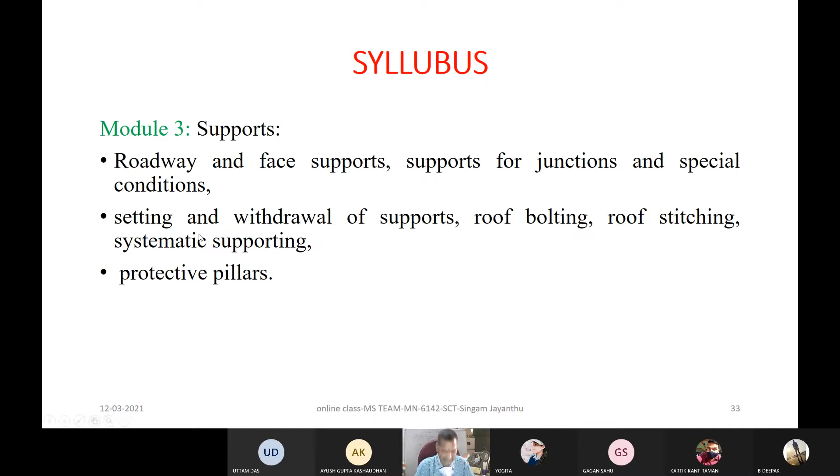From the syllabus point of view about the support systems and some material I used to share with you, whether in emails or WhatsApp, for the supports module we are supposed to know how supports are designed, protective pillars, and all these things. Some examples I shared, whether it is recent mine applications like KTK5 mine, Orient mine, GDK11 mine or VKP mine, where we are designing supports, where some accidents also took place, for development, depillaring, and so many things. Then protective pillars we designed for KTK5 mine for protection of the surface, all those things.

Then of course, stowing and filling methods gathering, regarding this we could not discuss much. That's why I would like to take some time on this syllabus with remaining issues, so that you should also have a lot of materials available. As far as our pedagogy, syllabus or structure is concerned, along with references and some materials already I submitted to you. You must have gone through, whether it is support related or whatever the courses we created, or the national mission project, or the pedagogy we did along with our IIT Kharagpur. Some of my junior scientists who are working now, we did it for that purpose of Ministry of HRD, now Ministry of Education. All that I shared with you.

So regarding the stowing and filling methods, gathering and transportation arrangements, I will be explaining something now, and a lot of materials are already there. That KTK5 mine, whatever I used to show you, along with photographs or whatever were there on the stowing related material, and reference other things, you must have gone through so many things. That's why I'm not reiterating once again all that.

These materials, submitted as a course on strata control, pedagogy, UCMM etc., prepared as part of our national mission project, are also made available to you. Many case studies of investigation, whether designing supports or whatever I used to discuss with you, must have given you some latest information.

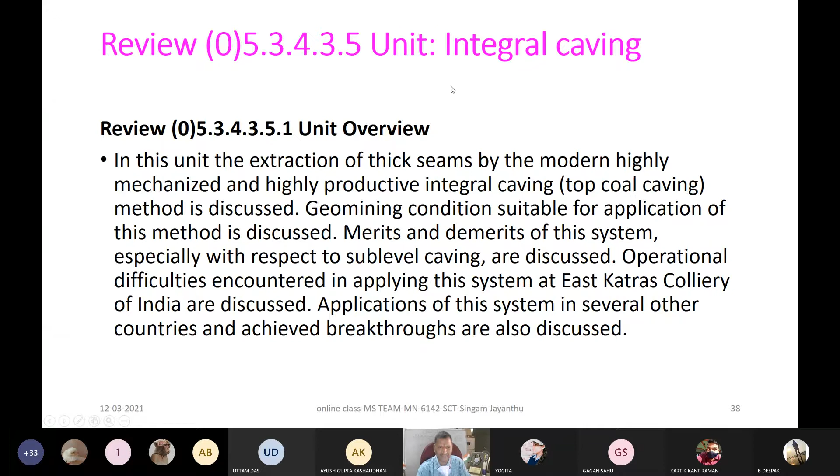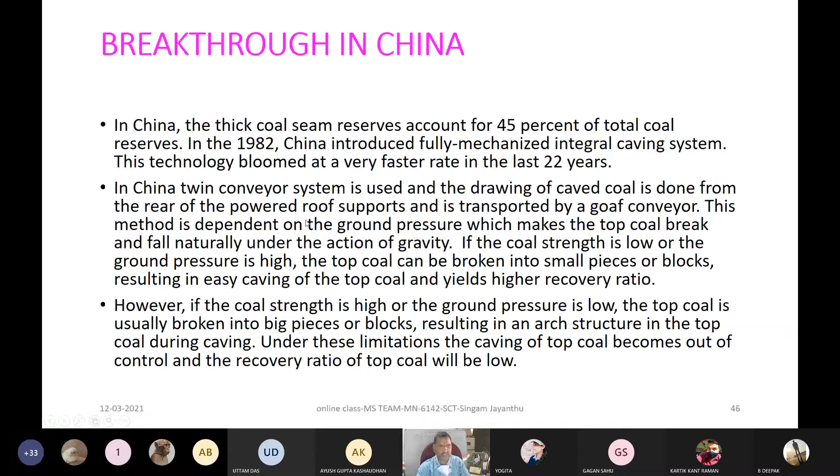That is the integral caving method, and as a unit summary, that method of mining and strata control related issues, supports, conveyor systems - all that material was shared with you along with recent information and present strategies, and then working steep and thick seams.

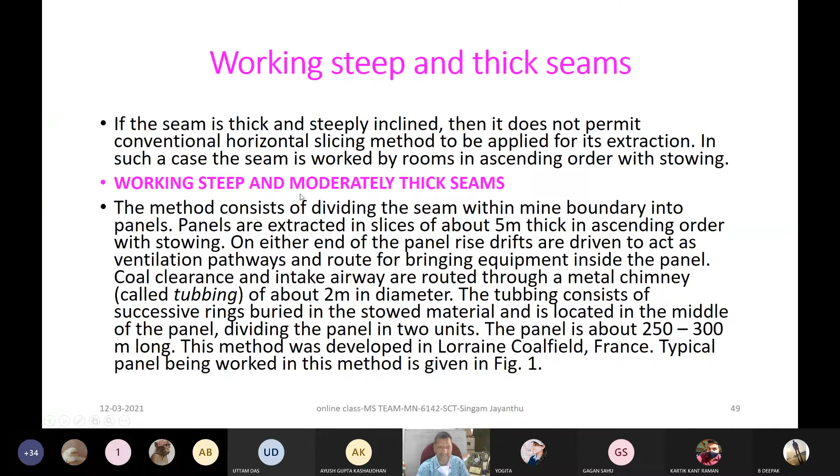A few topics, as part of our assignments, are also covered regarding working the steep and thick seams, whether it is the Camorra method, the Lorraine Coalfield of France, or the Velenjee method - one of our dear students also tried to explain. But there was some additional information I want to provide, which was there in the thick lignite bed.

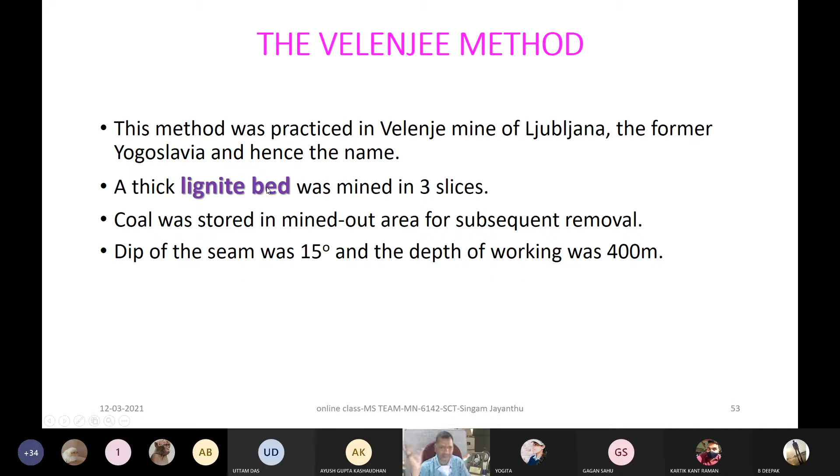That lignite has a nature of being very soft compared to your bituminous coal and all, right? That is also supposed to be noted.

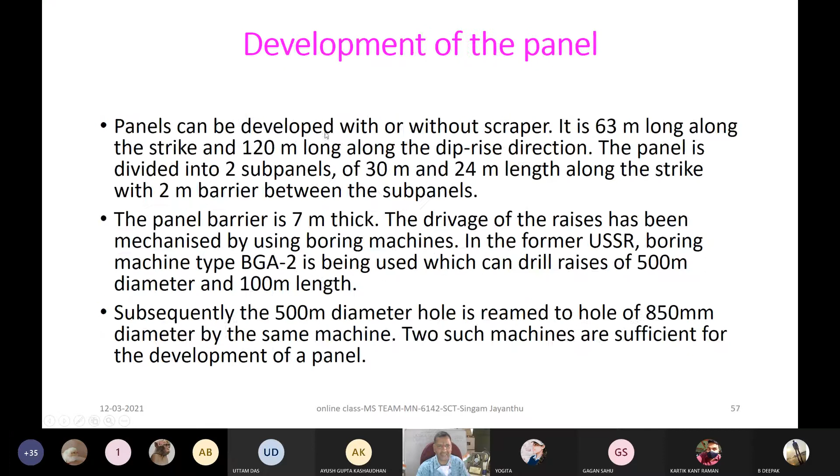In that method, a lot of things were discussed by some of our students, whether it is the descending shield method - I used to explain the installation of the shield and shield features, merits - many things are available in that material I provided.

And this Tipang mine in Assam - this is a place where we experimented. We, meaning our senior scientists in CMRS when I was there in the 1980s, under Dr. T.N. Singh Sahab, who was one of the eminent scientists in India and also Director of CMRS.

At that time, a lot of material was there, and further literature discussions were also done as part of this, and some special methods we also tried to discuss.

But I would like to say something more about this now before giving it over to your CR on the total status. For 20 minutes more I would like to discuss this, but please note down some important points - this non-effective width of extraction, right?

It can be with stowing, and that stowing can be with sand, fly ash, pond ash, sand - all those things. This is also part of some of our modules, and we'll discuss this a little bit, along with the go pillar method and chessboard method, which I also tried to discuss before.

Before going into the non-effective method, in a very simple sense - now, you may not be able to see the full screen. Let me stop sharing, then you will see. So for non-effective width, what I am trying to show is very simple.

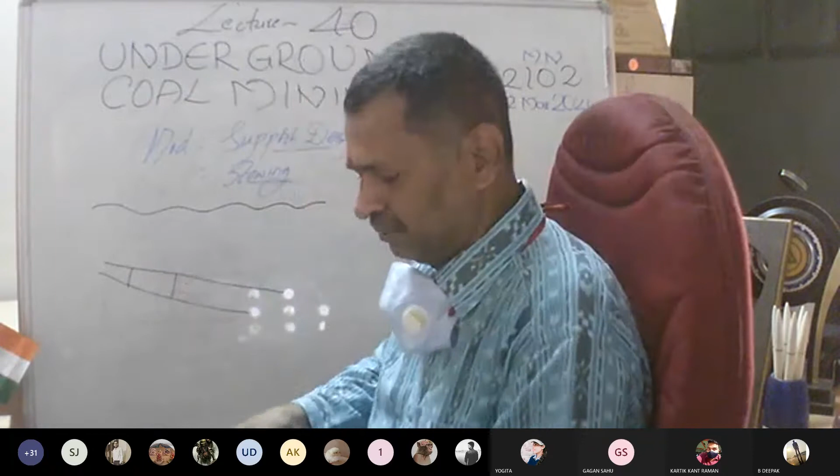If this is the surface of the deposit, and this is the coal seam whatever you have - in that case it's very simple to understand. Are you able to see the board? Yes sir, yes sir, very good.

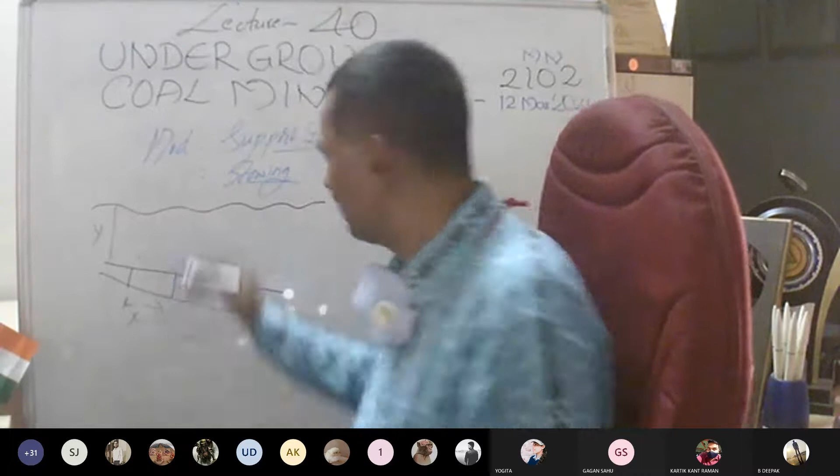So when this width of extraction is some x, right, and depth is some y - for example 200 meters or 20 meters, right - after some time, when the width of extraction increases, the roof layers which are getting disturbed fail...

...come to equilibrium, that changes. So there will be some width for those conditions - x1, then x2 - that may reach up to the surface. That is called the critical width of extraction. Then when we go beyond that, that is x3 width, then it becomes up to the surface.

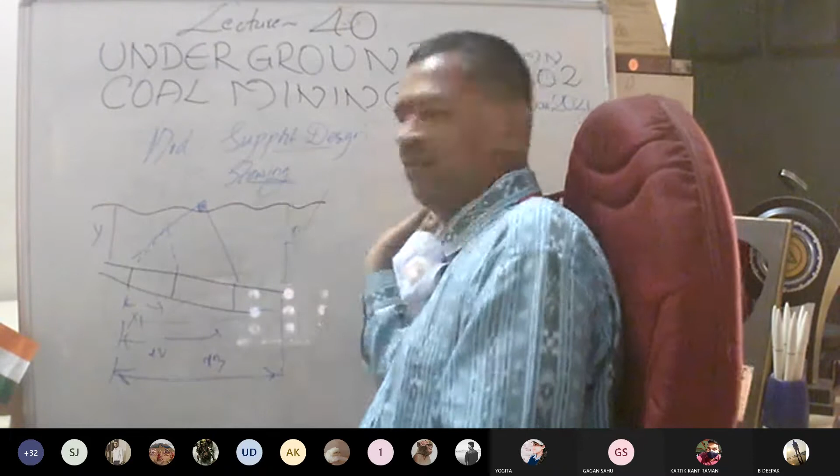There will be a subsidence, and this will be a positive angle of draw. Instead of a negative angle like this, this is a positive angle, right?

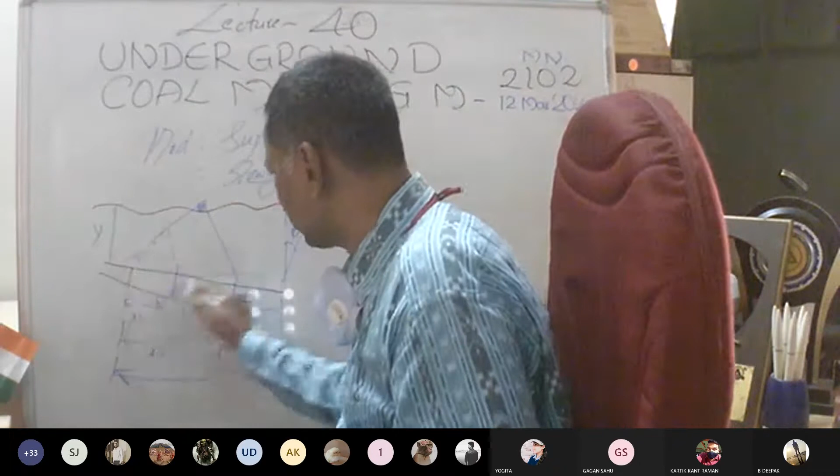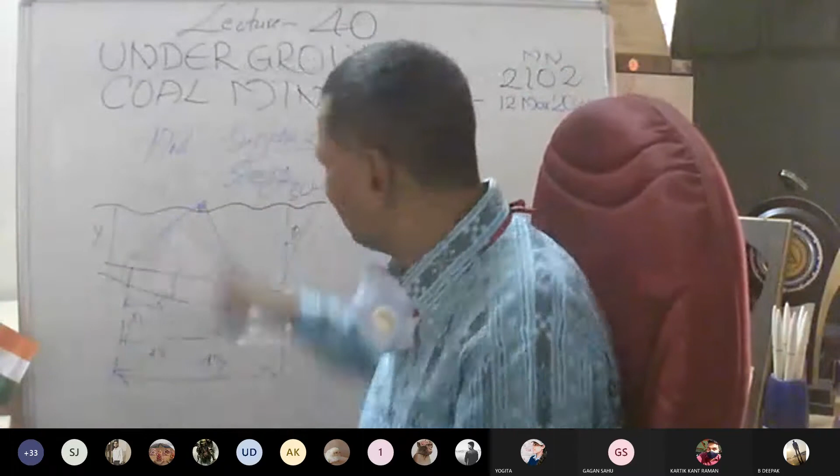So this is called a supercritical width of extraction. Below this x1, below the critical width of extraction, that is a non-effective width of extraction. Then when you design your method of working, maybe long wall or board and pillar, whatever it is, that width is restricted, so there may not be any damage to the surface. That is the simple essence of what non-effective width of extraction means.

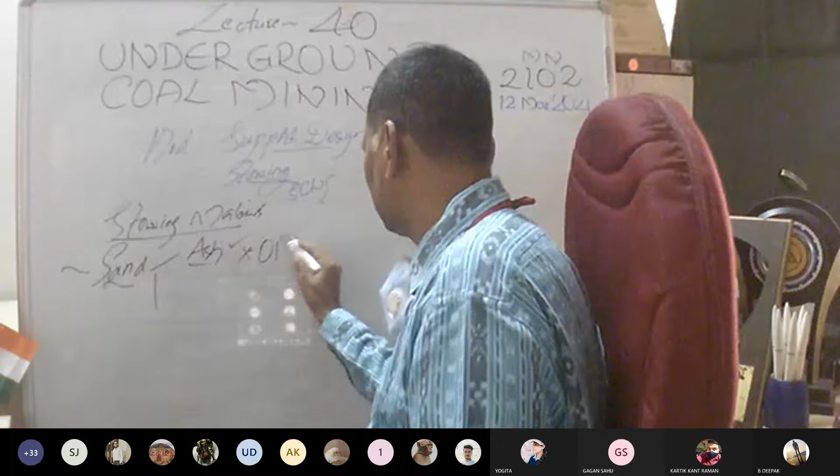Now coming to stowing related material, there are so many materials used, and as part of your previous semester you learned what stowing materials are used. Generally we use only sand, but sand is a scarce element now, so we go for pond ash or fly ash. And since that is also not available in sufficient quantity, we even go for crushing of the overburden materials. These overburden materials are crushed, and this is a very simple arrangement.

So why are sand or these materials used? What is the property of the material that is supposed to be inert? It should not react with the material that is coal. This is what minimum common sense also says, and a lot of things are written in the books. We can discuss further if there are any doubts.

Here, what is the arrangement made? If it is collected from the rivers, I would like to say with proud privilege that my father was working in this sand gathering plant in Singareni Collieries Company from my childhood, from second class, third class, fourth class, fifth class. In fifth class itself, I visited the underground coal mine where stowing is done.

So this is the arrangement made from the river. It is collected either from the pond. This is something like pontoons also, they used to call it. Otherwise a simple scraper - suppose this is a river flowing, I have a return drum on one side. This is a river flowing, so that is a source of our sand. Then this is our return pulley, and I have a scraper here. This is called a scraper.

I am pulling this, now my person operator is here, then he is pulling sand from that, and from here we are transporting through aerial ropeways and all. That used to be called Gaddala Madugu, in Old Kothagudem, that is in Bhadradri Kothagudem district now, which is my native place also, just behind the headquarters of Singareni Collieries Company Limited, where I was working as assistant manager in these underground mines in the 1980s.

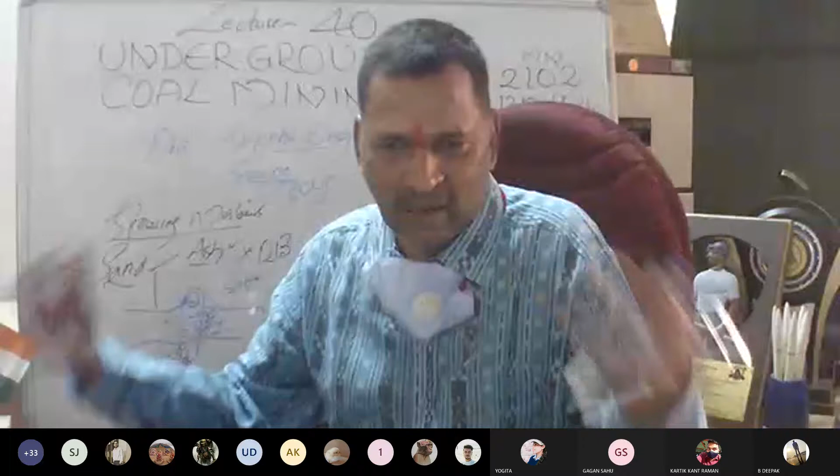So this is the way how we are collecting and transporting, mainly by aerial ropeways. We used to do that, otherwise by conveyor, otherwise nowadays private contractors transport it through lorries, trucks, whatever. That is the way it is transported.

Now how is this arrangement made on the surface for backfilling? This is very simple to understand. Even no power is required for this arrangement of sand stowing, unless it is paste filling. Note down, paste filling is the recent technology, so that we use less water, and when there is less water, it takes less time for consolidation or solidification, and less water needs to be pumped out, and there are so many advantages. That's why paste filling is the latest technology for backfilling.

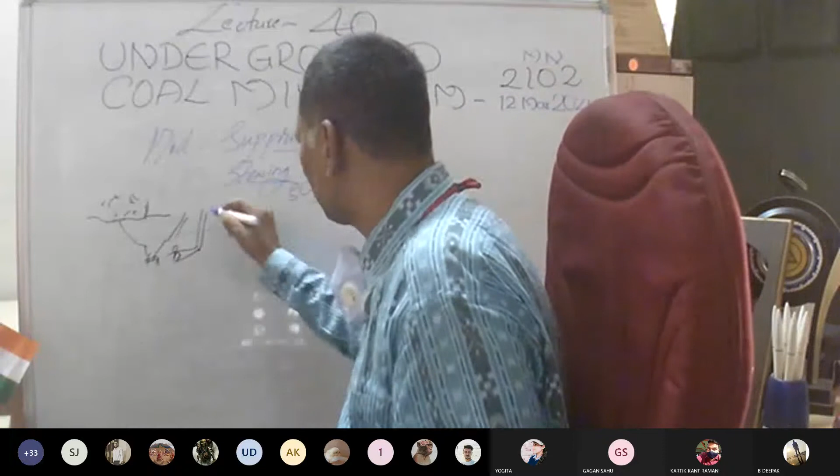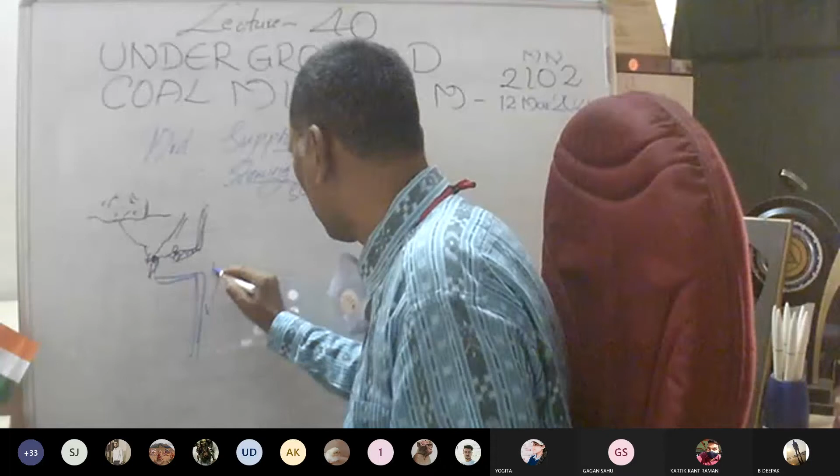On the surface, I have many examples of how we designed bunkers and all those things. Now this sand is collected in the bunker, and one of my persons opens a small chute or opening, and there is an arrangement of water - let me show you through blue color. So this is the water arrangement, mixed with water, and from here through different pipes, through the borehole or through inclines, you are sending this mixed water plus sand. The proportions and everything are written in so many books, don't worry about that, you can have a look at it.

So now it is flowing through this. For this, no power or nothing is required, very simple, right? It is by gravity, it is simply flowing through, and then it is reaching to different working places.

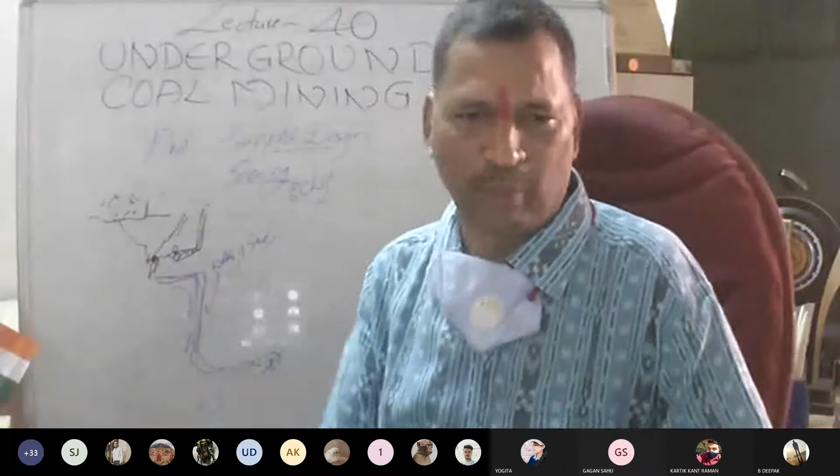Simple. There is a bunker where that sand is stored, and then a person is there, the strainer where whatever stone pieces are there, they are separated out and mixed with water, right? And then water and sand is simply flowing through the pipeline, and then there is a hydraulic gradient.

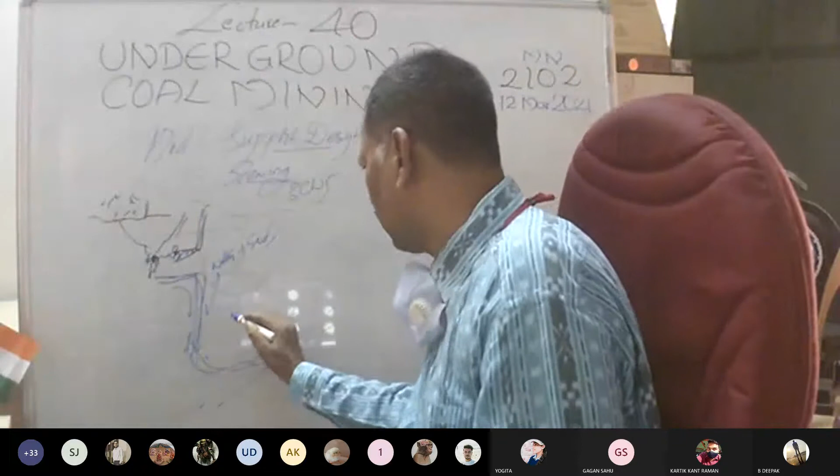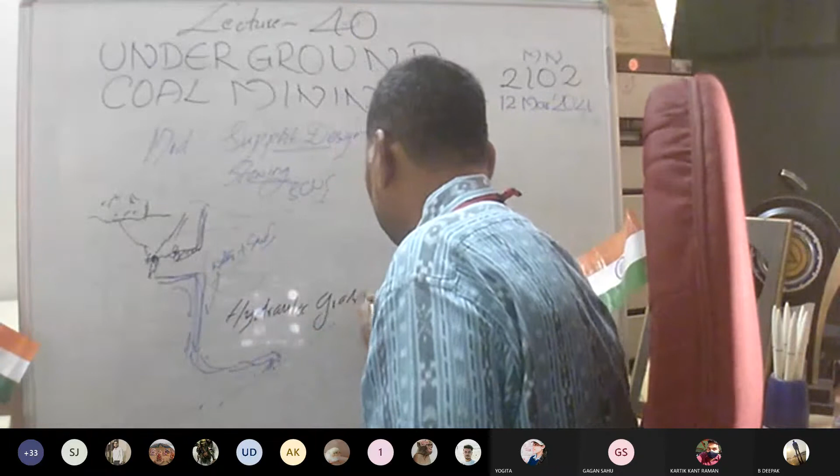This is an important point you should note down. Hydraulic gradient. This is supposed to be maintained. Otherwise, there will be a jamming of pipelines if sufficient pressure is not there. Although all this is with your natural or gravitational force, it is acting. This is the simplest arrangement of sand stowing or any type of backfilling, right?

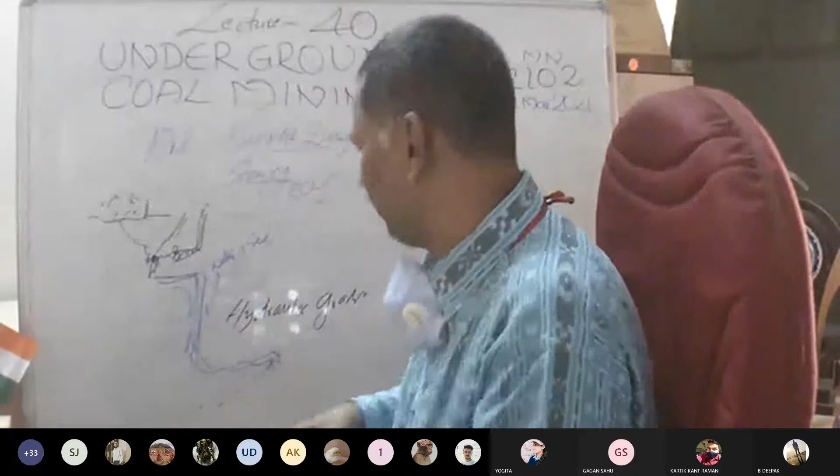But when it is paste filling, that is a very important aspect here. Paste filling is a technology people are using, right? What is required in the paste filling? It requires a lot of arrangements even to prepare that paste. That paste is supposed to be prepared with sufficient formulation and mixing with some type of additives, so that there should not be any coagulation, right? Any jamming of the pipeline.

This is the way how generally it is done. That's what I wanted to highlight before going into the next aspect of our part. Let me share it now.

Non-effective width, that part I would like to mention. We can discuss many things later also.

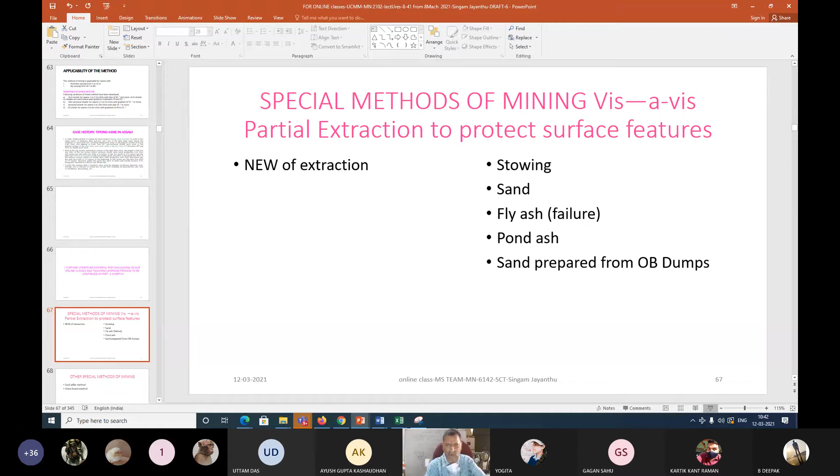Nowadays we are preparing this sand from the OB dumps also, and Singareni Collieries Company Limited is a pioneer in preparing this, and they are doing that. In Southeastern Coalfields also they wanted to apply it 4 or 5 years back. I was there with them.

Right now, fly ash is a failure because there is a lot of damage when you are filling it back with fly ash; this is causing a lot of pressure on the barricades, right? Barricades are required to hold that fly ash or sand, whatever it is, and that should be in such a way that dewatering should be properly done. Otherwise, what will happen with that water? There will be a lot of pressure, right?

So when it is a coal seam, a gallery, you are filling this part, then when it is a gallery like this you are filling, you will be constructing one barricade, right? Then the other part which is something like a room you created, and in that you kept the pipe, whatever pipe I have shown here, this pipe will be kept up to that, and then you will be doing that filling back, and that barricade, whatever water is left out, that will be coming out and you will be pumping out. And if that is not properly decanted or that dewatering is not proper, then that causes a lot of pressure on the barricades. That is the reason why fly ash is a failure, which we conducted.

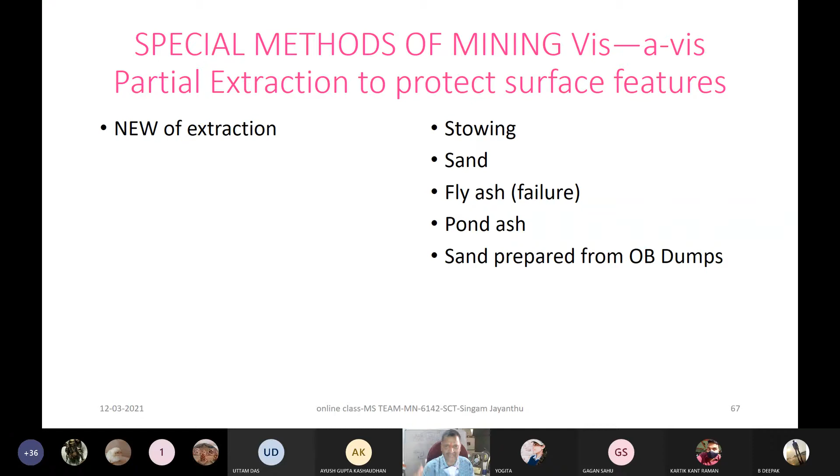So you can write these names, you will get a lot of information. And then CIMFR, CSIR, all those things, right? Because in Manuguru, in SRP 3 mine and GDK 1 mine, right? These are the places where we tried to do it, even with pond ash. And KTK 5 mine, there is a failure with fly ash. That is the reason why I am telling you. Okay, then go pillar we already discussed, but chessboard, that is nothing but in pillars.

When pillars are there, this is also to create some type of non-effective width of extraction. When there are pillars in this way, what we are doing is we can create non-effective width of extraction such that I extract only one row of pillars or 2 rows of pillars and leave the other rows as barriers. Only non-effective width in that way.

Otherwise, chessboard means I can leave this pillar, extract this, and leave this. So this is another way where this much is a non-effective width, so that will not fall. There are so many ways people try, but it is not very popular. Let us not discuss much.

Now coming to the most important aspect of designing supports, I have already given you these materials. Let me know how many people could go through some of the course materials I sent to you, the course materials on support designs. Have you received it? Because we conducted many courses, more than 20.

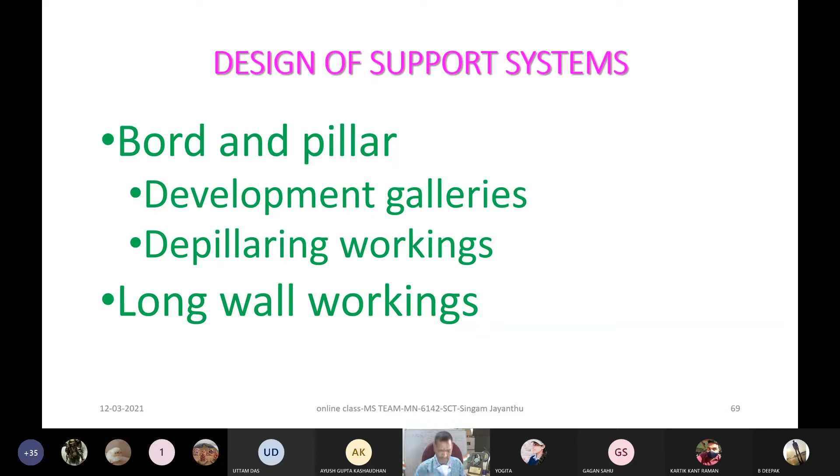Yes, right. So in that itself I have a lot of material, but don't worry to read all that for the time being. Only the material related to support design is sufficient. In that itself, what we are supposed to understand is bord and pillar: in the development gallery how to design the supports, in the depillaring workings how to design the supports, and in the longwall workings how to design the supports. If that is understood for your present purpose of this pedagogy for this semester, that will be okay for you. And of course you will be learning more in other courses like Strata Control Technology and so on.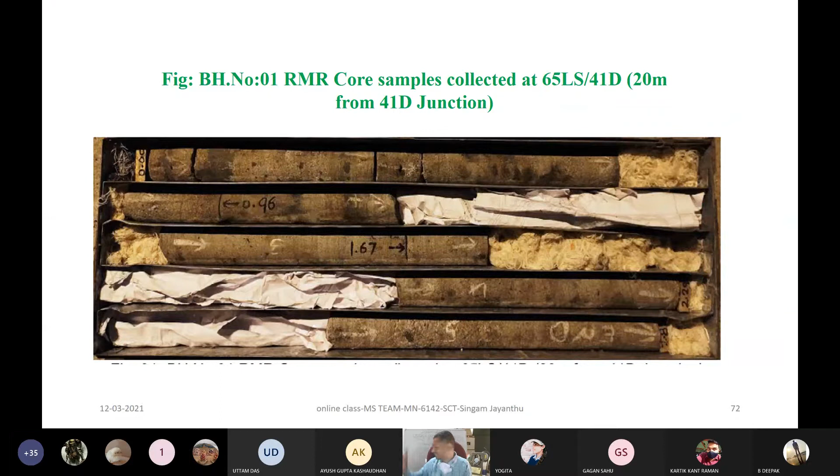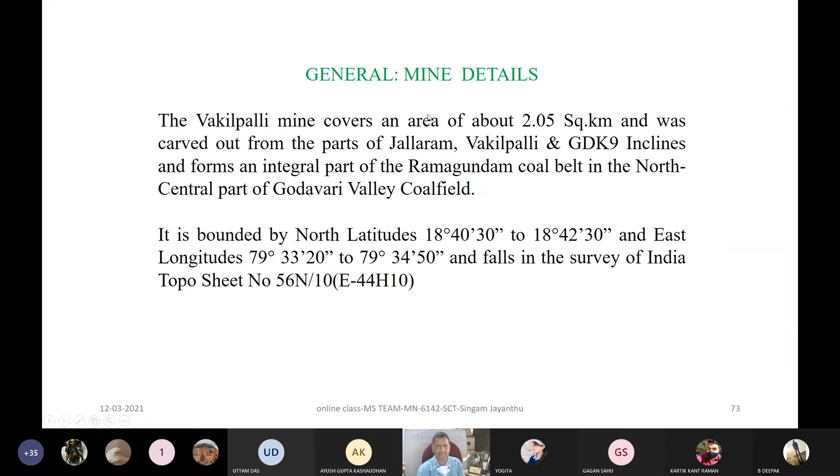And these are samples, it appears like this. I was showing you at that time, I sent a lot of materials also at that time, but this is one simple example where some investigations for that are done. But the basics behind this is to understand this rock mass rating.

What we do is we make a borehole up to around 2 meters in the roof. Why should it be 2, why not 2.1 or 1.8? These are all based on our previous experiences and also some scientific studies. More so, it is an empirical formulation rather than any analytical or numerical model study.

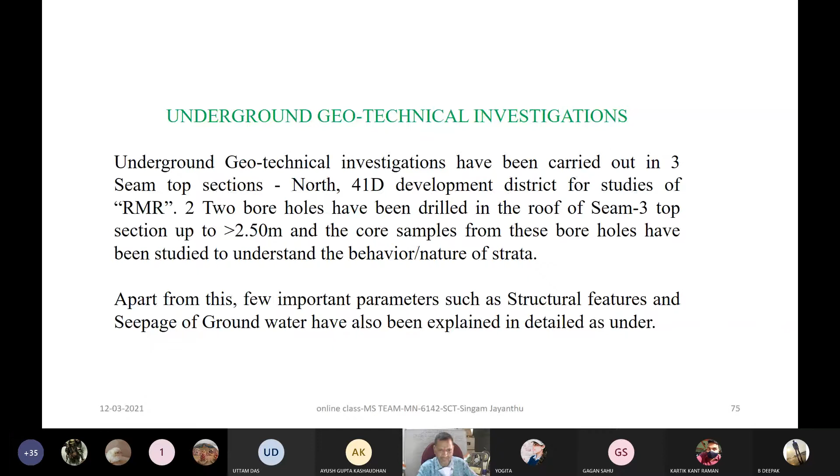And we will be observing what is there in the roof rock mass at that place, and then we will be designing the supports accordingly. I think it is better to show your material first, whatever was there, then it becomes easy, I hope.

Sir, you're muted. Can you hear my voice? Are you able to hear my voice now? Because it was like this. Now somebody can talk. Are you able to hear my voice? Yes, sir. Now? Yes, sir.

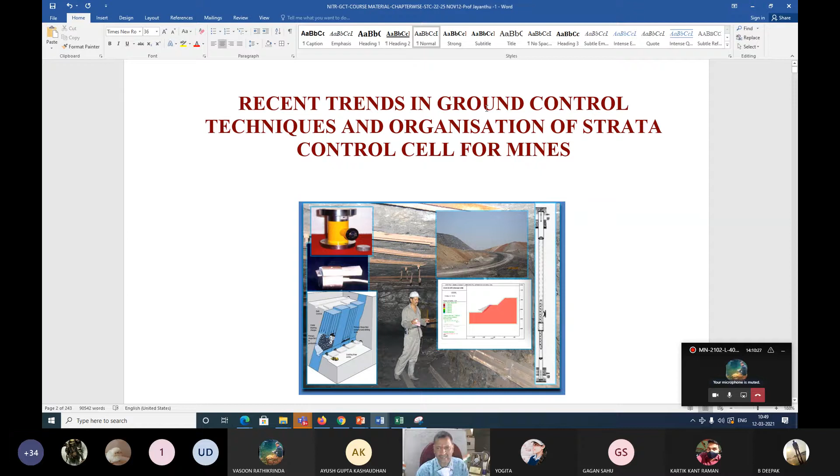Very nice. So like this, we conducted many, around 20 or more courses, to train our Indian mining engineers, right? And with almost everybody, this type of 10, 15 books are available with them. Of course, at that time we didn't have that craziness to write books or publish books or get things like SCI publications and all those things. This was to create more awareness and help the industry in solving the problems. That's what was the main issue, and that's why these type of courses were conducted since 2008.

One of the materials I gave to you, my beloved students, in this you need not worry much about all these things. What is mainly required here is the design of support systems in development and depillaring workings. So that is sufficient for you, because otherwise it may take more time. Yes, design of this support system.

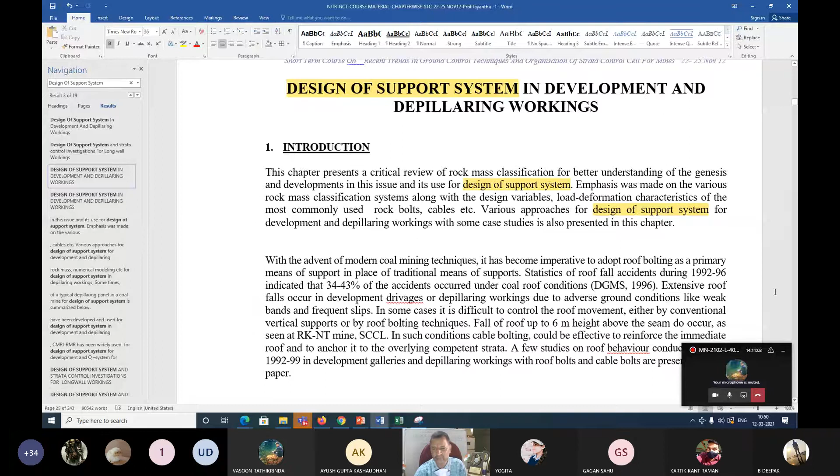That only I will be showing you, so that it becomes easy for you to understand and learn something more. Now you see, basically rock mass classifications are so many, and in that way we have taken some important points you may note down. You have taken Bieniawski rock mass classification, right? It was developed based on some South African and other countries' mines, and then they tried to give some empirical formulation on the support designs, whether it is for tunnels, coal mines, or metal mines, whatever, right?

And then one of my colleague scientists long back in CMRS, working along with me, Dr. N.M. Raju Saab, and Dr. Venkateswarlu, right, who was my colleague scientist and later also director NIRM. Out of their PhD topics, they were working on this, trying to apply this Bieniawski classification to our Indian mines.

And that is some good friend from NGI, Norwegian Geotechnical Institute, Norway. He also did good work, and he named it as rock mass quality, right? So rock mass rating, Bieniawski, we modified and used for development workings in coal mines for board and pillar working, and Barton's rock mass quality we used for depillaring working support designs. So those things I would like to say something, so that it is easy for you to understand from the material I provided, even while preparing for the examinations.

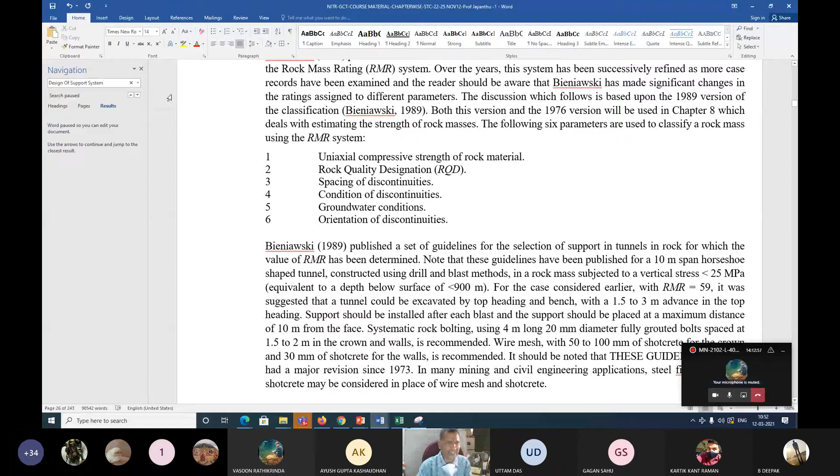I think I can take 10 more minutes, and then we can discuss the latest status and other things. Now, any doubts? If required, of course, we can have some additional classes also based on convenience and other things. Don't worry for that. I know you people are very busy.

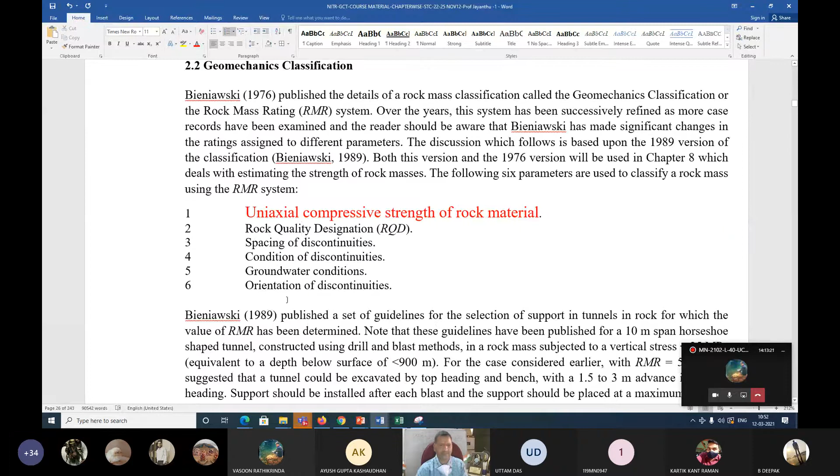Now, this classification has uniaxial compressive... What are the parameters? Uniaxial compressive strength, then rock quality designation, spacing between discontinuities, condition, groundwater, orientation of discontinuity, all these parameters he considered, right? And we tried to import that and later modified this rock mass rating for our Indian mines, and that is one for our coal mines.

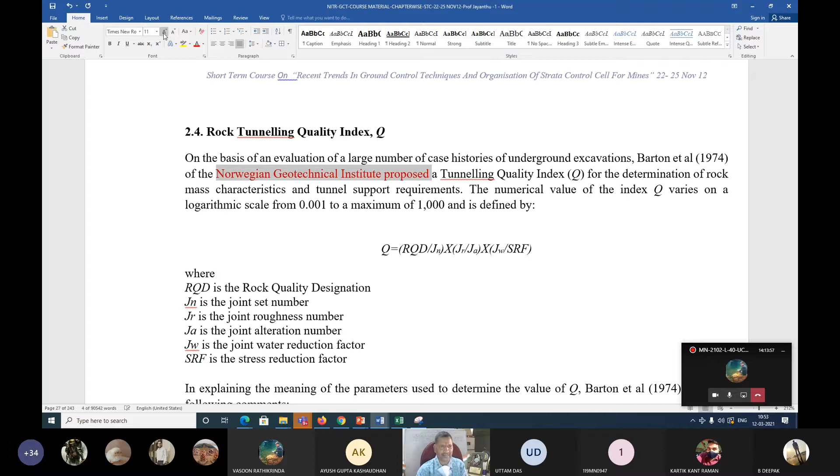And before that, let me tell you one more, rock mass quality, which we use for depillaring, by Nick Barton, with whom we were working on different platforms and some workshops also. I hope I have shown you some of the material we prepared along with Dr. Nick Barton, and you can note down the names. Norwegian Geotechnical Institute, that's what I was telling you. Now there is one Rajendra Bhasin who was working with Barton. He's a geologist, a good friend, right? So you can write these names, you will get a lot of things.

And now basically this is the equation used for this rock mass quality. Why is it required? This is just to classify that in similar conditions, if in mine A the rock mass quality is some number X, and in mine B it is also X, then whatever technology I used, as far as support design, this may work well. So this is the reason why people try to classify the rock. Then rock mass classifications were made based on different approaches.

And in this is the rock quality designation, RQD by Jn. Jn is the joint set number, and then Jr by Ja, that is the joint roughness number and joint alteration number. And these are some of the issues which you people will be learning in detail. But before that, let me know, are you learning this already as part of some other course, rock mechanics, geomechanics, something like that? Let me know so that I give less time for this and explain more about our present problem and designs.

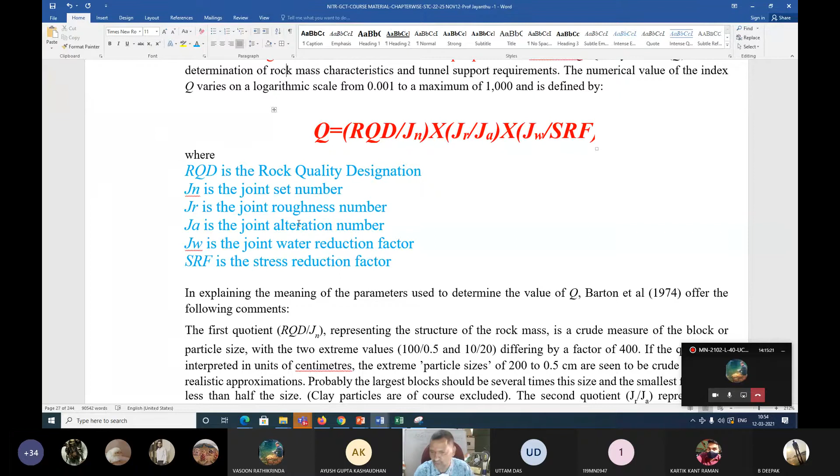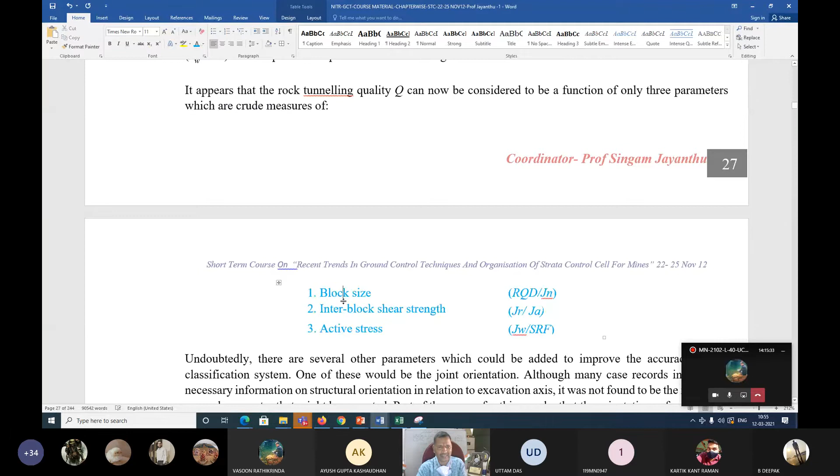Yes, no? Yes, sir. Very nice. So I need not explain much about this. So you know about this rock mass quality and why this is given, right? So that we can discuss more on its applications, right? Later, this is our ISM CMRI.

The name also came just like my beloved students. I told you, everyone is like Arjun for me, right? To develop new science, right? Only scientists can do nonsense things to develop new science, that I used to tell in the 1980s when I used to feel like a scientist of CMRS or Ministry of Mines. But now I say everybody is a scientist, okay?

Right. So this is a CMRI scientist who did a PhD under ISM, Professor A.K. Ghosh.

That is the way we have given the name. I wish that some of you people, whether it's Yogita madam or Karthik or Jasmine madam or somebody else, if you are doing excellent work, then definitely that will become like one as a NITR, and you may be working somewhere in IBM on an NITR classification system or approach for designing artificial intelligence, whatever, right, you can do that.

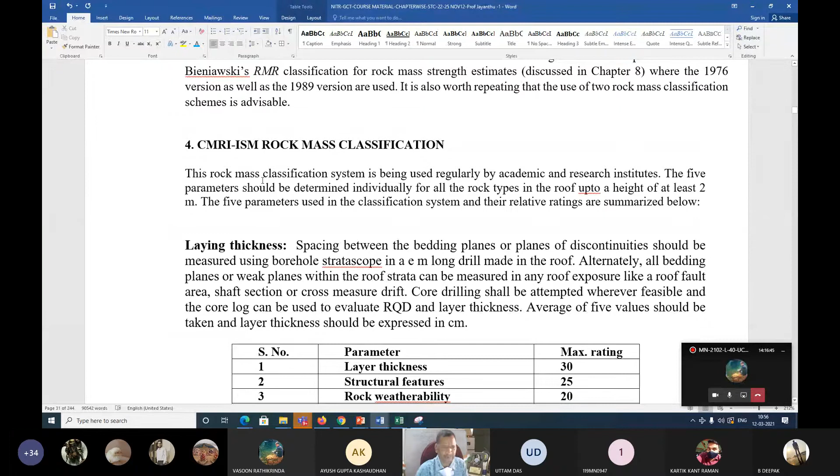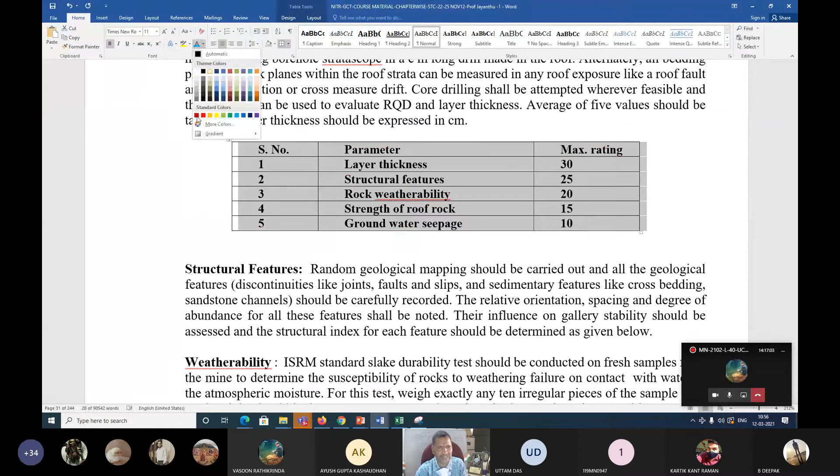You have that capability. Now, this is the system where layer thickness, this is not laying layer, it doesn't matter. And these are the 5 parameters that I think you must have learned. Yes, no? You learned about it? You should respond to me so that I save the time instead of repeating the same thing. Of course, these are the 5 parameters in the rock mass rating. It is supposed to be estimated, right?

And maximum rating is given to layer thickness and structures 25, rock weatherability 20, strength 15, groundwater seepage 10. It is very simple to understand here, my beloved students. Here, rock mass rating of whatever the 2 meters inside the roof, right? So it may be very strong rock, but if it is having a lot of joints, obviously its stability will be decreasing. This is the way you can understand easily. Other things I will explain later depending on the time and your interest, okay? Because there are so many blunders in the rock mass rating also that I am not telling now, but you should just learn what it is.

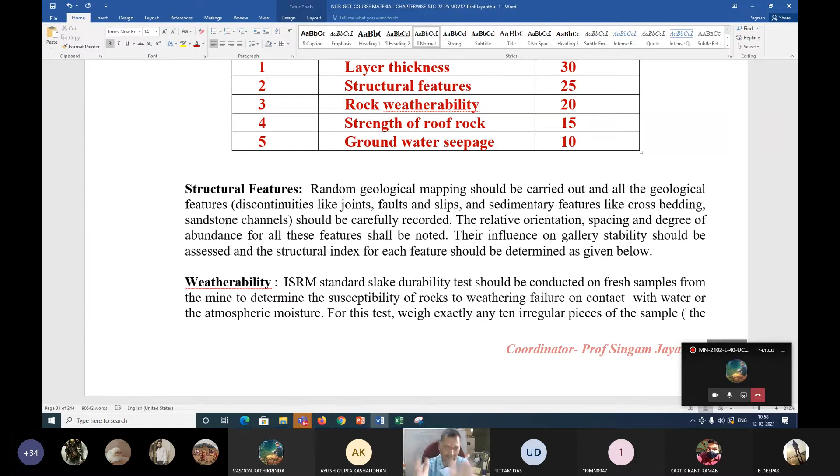And here you just note down, there was a Paul committee report in 1988 and also a circular where it has given all these details, how it should be done. And it was revised after 10 years, that is 1998, it was not done. And this rock mass rating was also applied and tried through a Ministry of Coal project by my colleague scientists, Angad Kushwaha and my team, Raghavendra and other people, even for depillaring also, but it is not widely used. For depillaring, we are using rock mass quality. For development, we are using rock mass rating. With that, now let us go ahead.

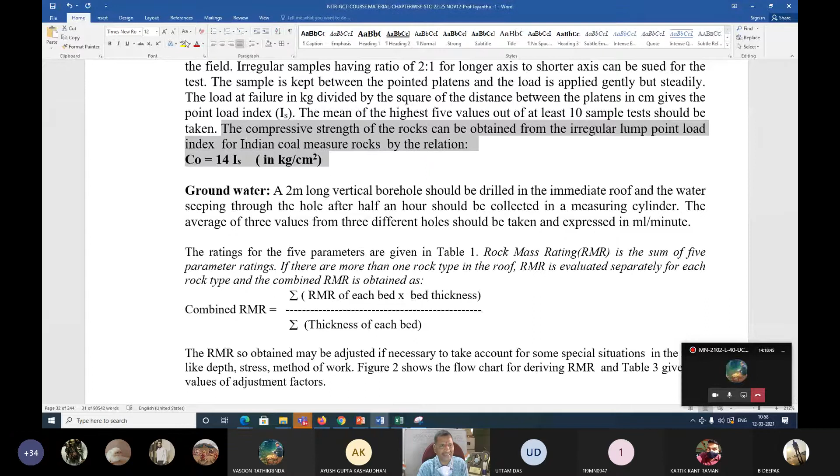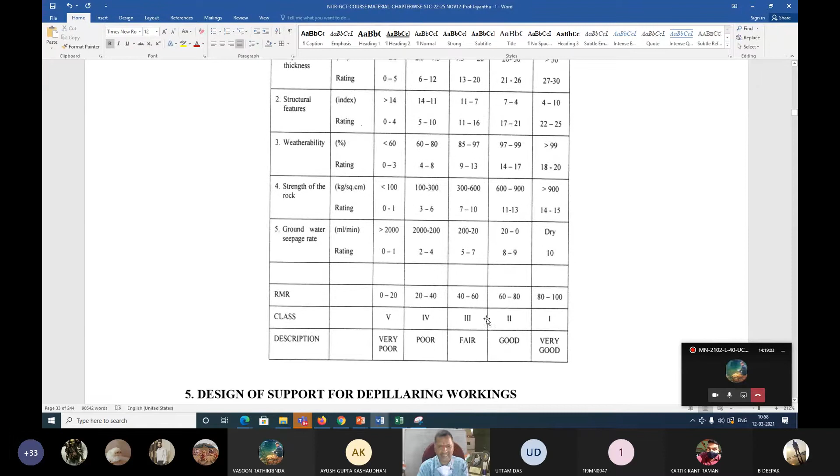So structural features, weatherability, rock strength, and rock strength generally we do with our impact strength index, whatever we determine in our laboratories. Those things also you will be learning. And ultimately for different layers, you will be estimating it, and then we'll be taking a combined rock mass rating. And these are the equations to classify when it is very poor roof, poor, fair, good, very good. And for a typical mine, I am showing you here, the depth of cover is around 140 and height of extraction 2.2, number of pillars 49, number of pillars left as a barrier, don't worry as far as design is concerned now.

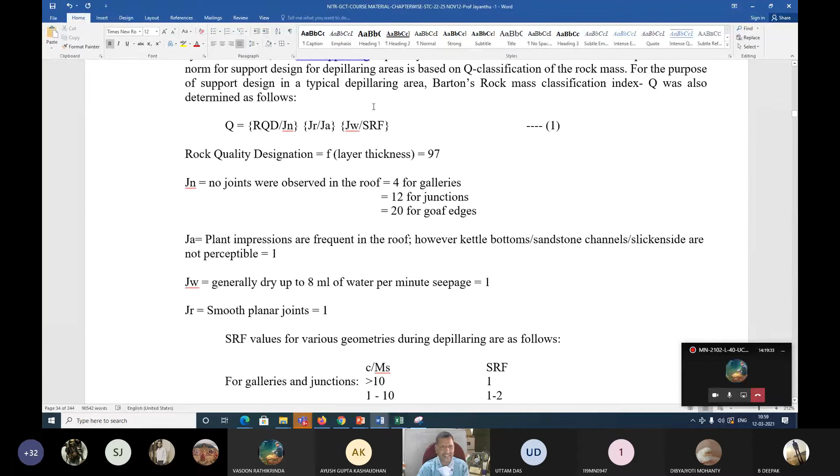And with this width of the development gallery 3.6, height of development gallery 2.5, here you are designing the support. So when you are designing the support for depillaring, rock mass quality is estimated, and for that RQD, Jn, Jr, Ja, Jw, SRF, for the time being that will be given to you. But how to do that? A lot of material I provided to you. You can also read. Any doubts, of course, we can discuss anytime.

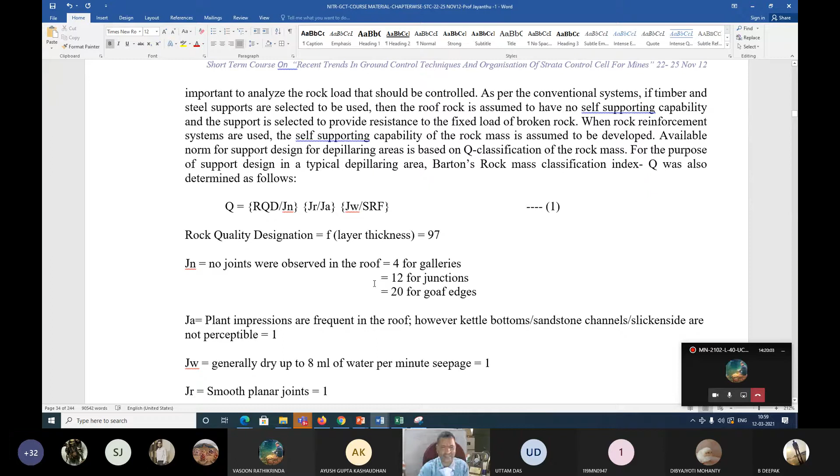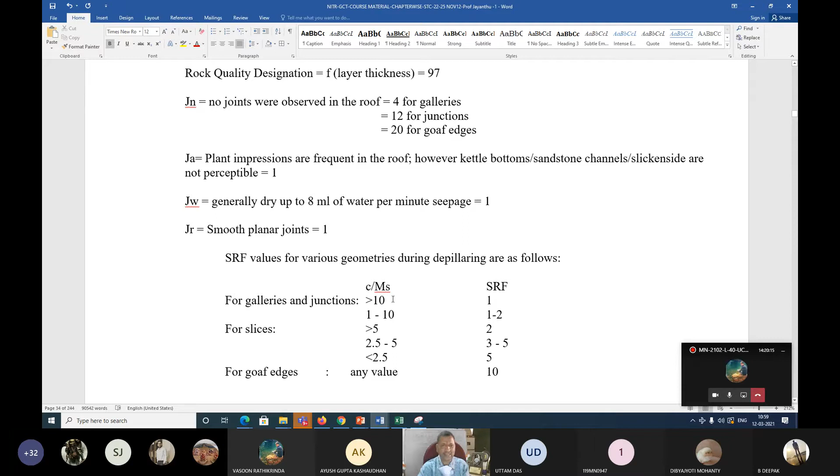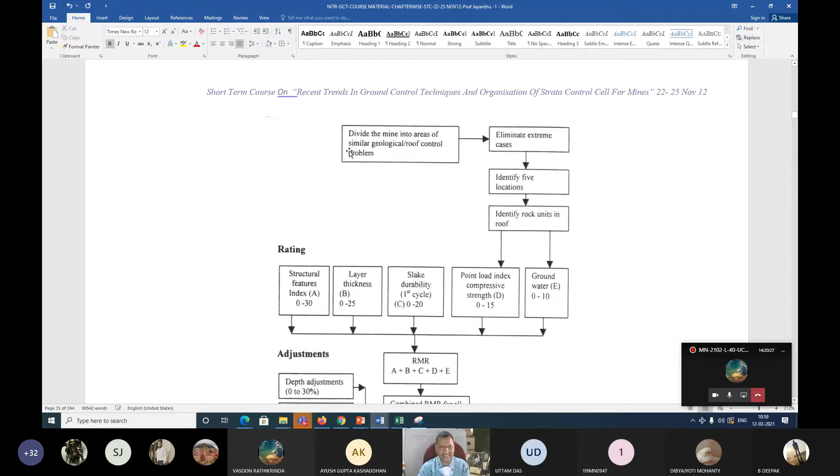So in that way, we will be deciding for the galleries and junctions, for the slices, what is the stress reduction factor based on the in situ stress estimated and compressive strength. These are the different parameters given, and then the rating system given. In that rating, how it is done, it is provided here. A procedural flow chart is also given here, and in that system of support for the development galleries there is an equation that also I will show you.

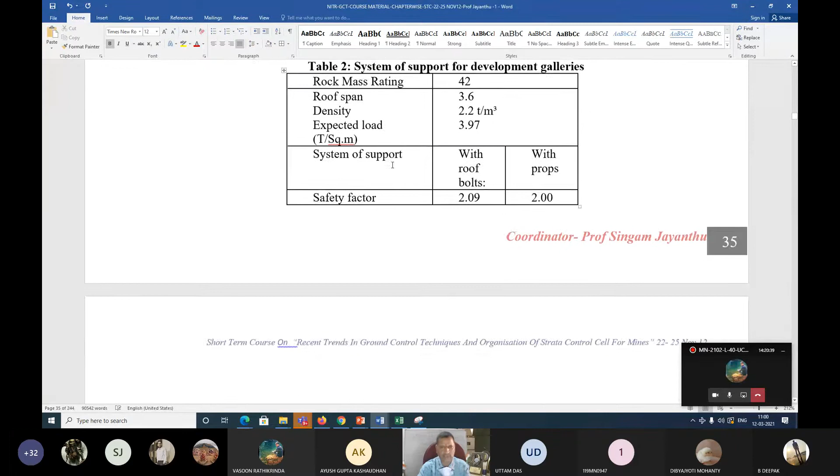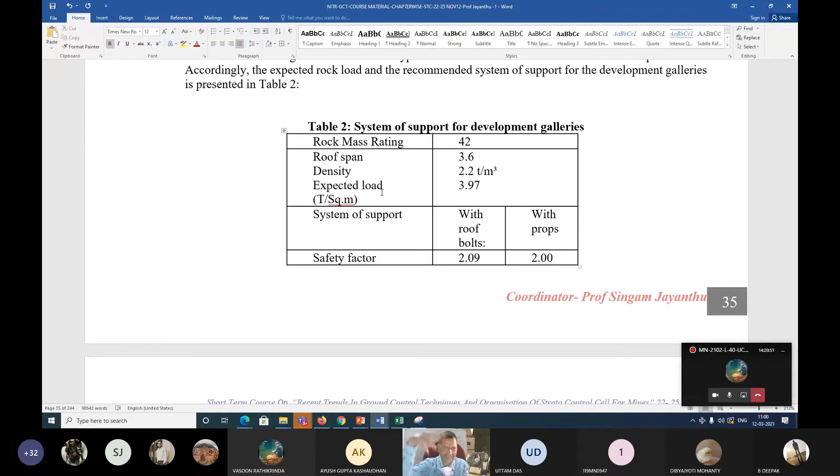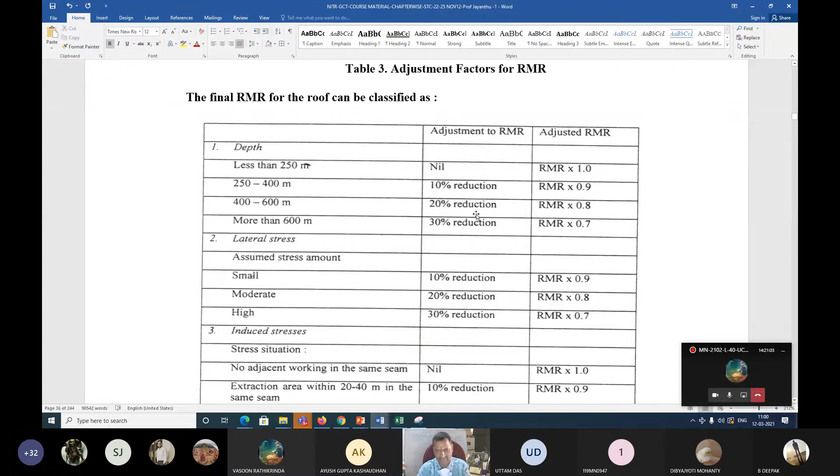With roof span 3.6 meter, density 2.2, then expected rock load based on an equation of rock mass rating, and then the support density, how much load is acting on that. So with that equation it has come 3.97, and now you have to decide what type of support to be used. And then rock mass rating for the roof, it can be classified into different classes, right? Because these are the adjustments required. Here I would like to highlight this point, my beloved students of underground coal mining methods.

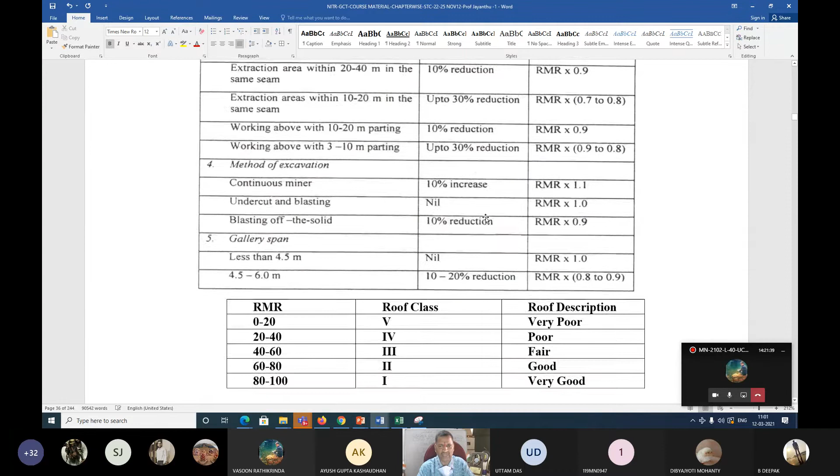And when you learn other future courses like strata control technology and all, definitely you will be learning more, and you will be capable to go into the mine and estimate what is the rock mass rating and design the support systems also in those courses. But for the time being, depending on the interest and the time, we will be discussing these types of issues, all these materials. Any doubts we can discuss, but the logic you should know: why adjustment is required.

When it was done by our Venkateswarlu or Dr. N.M. Raju sir as a part of their PhD, already I told you how this rock mass rating was developed for India by our colleague scientists long back in the 80s. At that time they collected data from different mines, and no mine was more than 250 meter depth. Then if you want to use that information as an empirical equation in other conditions where it is 300 meter, 400 meter, definitely you should have some adjustment.

That is the meaning of using your different equations, whether it is an empirical model. An empirical model should be used only within the range of the sample data, the parameters, whatever you have collected. Otherwise, you need some modifications. That's what, as a layman, you should understand. That's why I told it in a layman's terminology. For that purpose, for lateral stresses, induced stresses, a lot of materials are there.

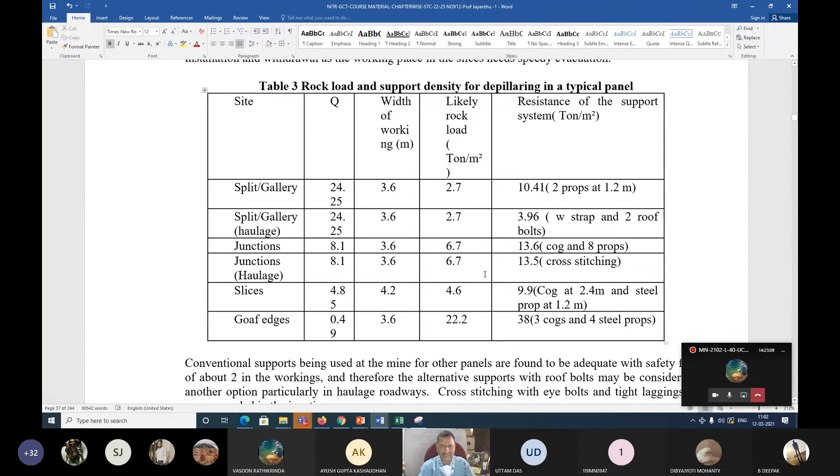And then for those mines, now in the splits, based on the rock mass quality, which is 24, 25, whatever, at the goaf edges, the rock mass quality is very poor. Very high stresses will be there at the goaf edges. The stress reduction factor will be very high. Then the width of the workings at that place, then the likely rock load based on the equations given there, you can see later.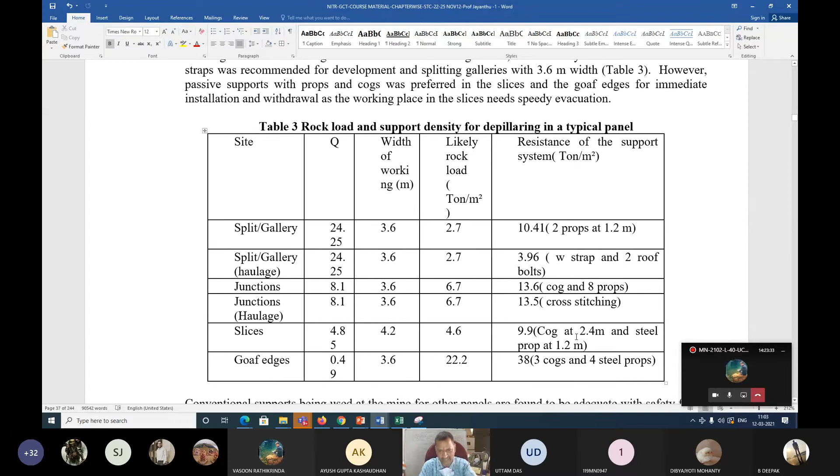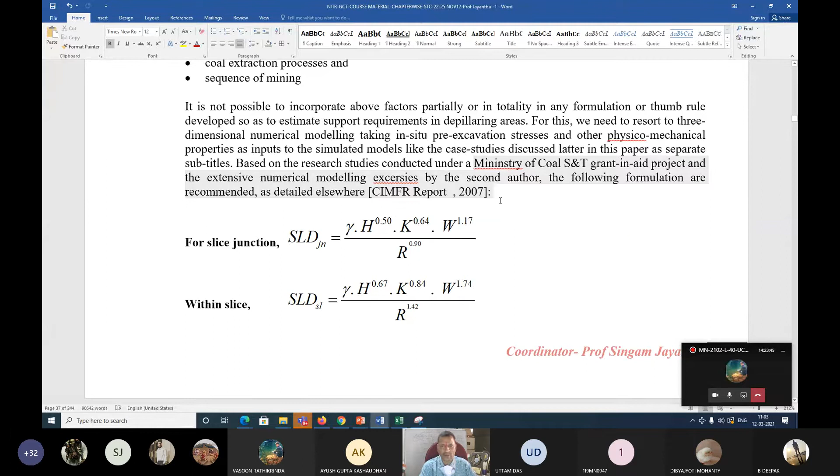Then the likely rock load you have to estimate, and from there you will be giving the support system, whatever you have seen in the previous classes also. A prop can give 10 tons, 20 tons, 15 tons, a W strap will give this much, a roof bolt will give this much, a resin bolt will give this much, then you have to design the support. That's what I wanted to highlight there. And then, as already I told you, in 2007 one of our colleague scientists tried it in a Ministry of Coal project, but it is not.

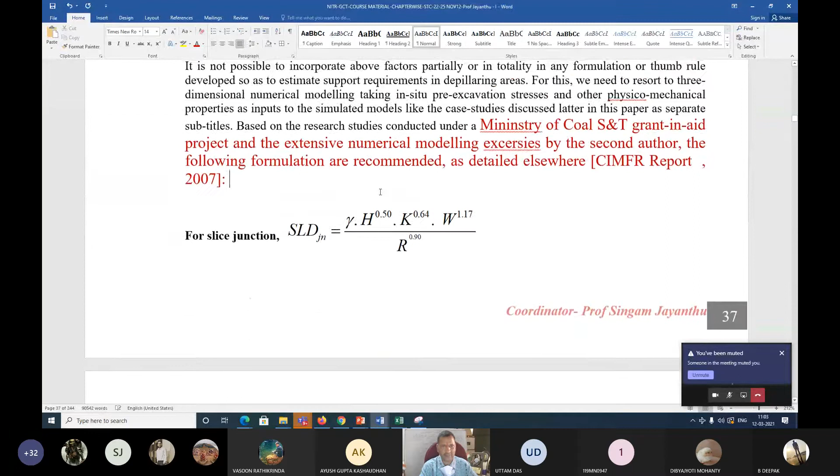Sir, your voice is not audible. Very nice. Now you are able to hear the voice. Yes sir. Let me take a small break here. Yes, right? Yes sir. Small break here. Any doubts? Want to say anything? Here.

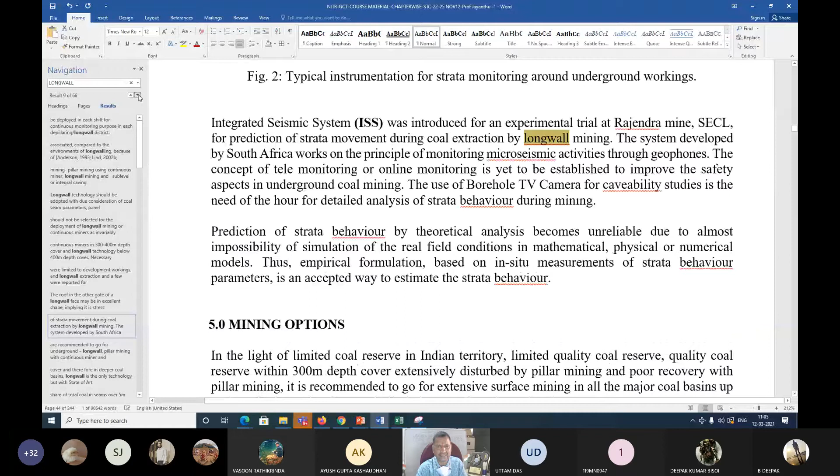Yes. In this, I have given you for the longwall, and for development and depillaring. In those materials, already I have given designing supports in different systems, right? Whether it is for the longwall, for designing the support in longwall panels, we have given different types of approaches used. Yes, design of support system and strata control investigation. Only design of support, that much is sufficient for you for a few minutes, so that you are not left with any material unattended as far as our pedagogy is concerned, my beloved students.

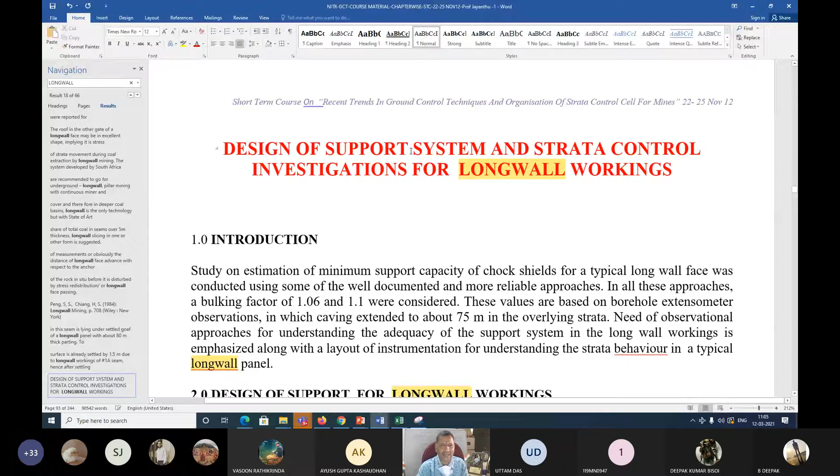And here, in this design of support, there is something different between bord and pillar and longwall. So in bord and pillar, what is happening? That's why I kept it here. In bord and pillar design of the supports, on both sides there are some pillars, right? They are taking load. That's why designing a support is based on our rock mass rating, whatever I've shown you in the material and whatever is there in our own courses. More than 20 times we conducted training for more than 400-500 engineers in India.

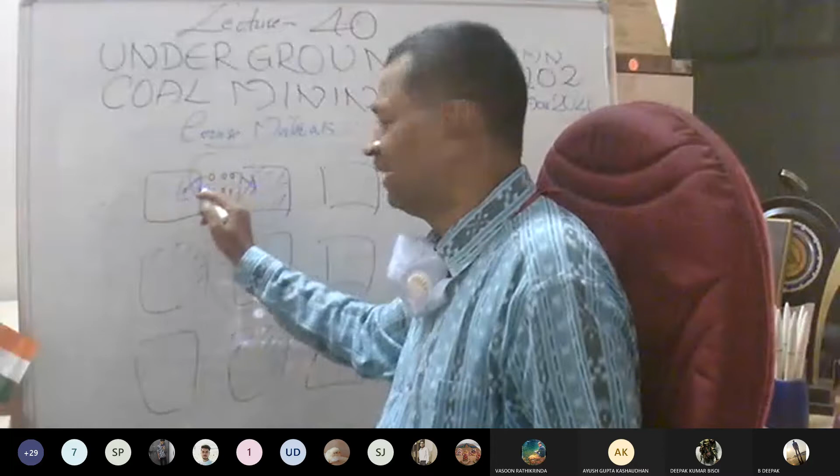That material is with you. Now compared to bord and pillar working, in bord and pillar development we use rock mass rating. When it is extracted with depillaring, there is splitting, slicing, and at the junctions we decide the support system. All those things in the slices, and this goaf edge is a diagonal line of extraction, moving like this as a diagonal line.

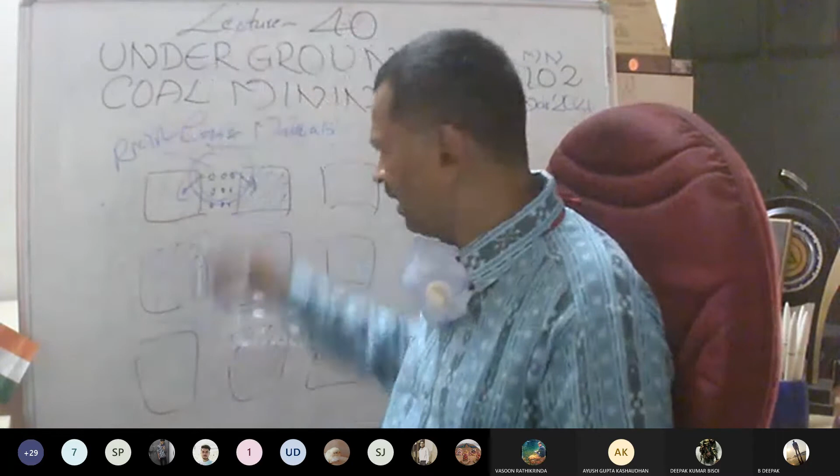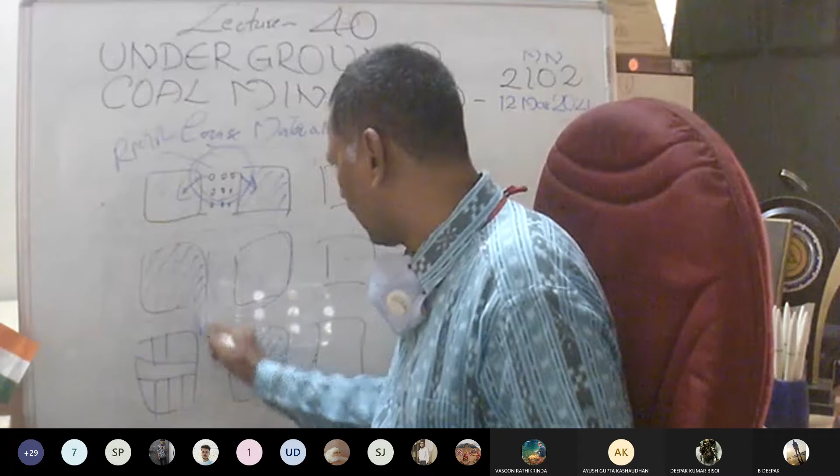There is a slice, and there will be more load coming on the slice. More than that, on the goaf edges there will be still more load acting, so there will be more stress. That is the reason why rock mass rating has not been used in the modified rock mass rating by Angad Kushwaha and other colleague scientists. The Ministry of Coal project in 2007 tried to consider that stress situation, but we are not using it widely till now.

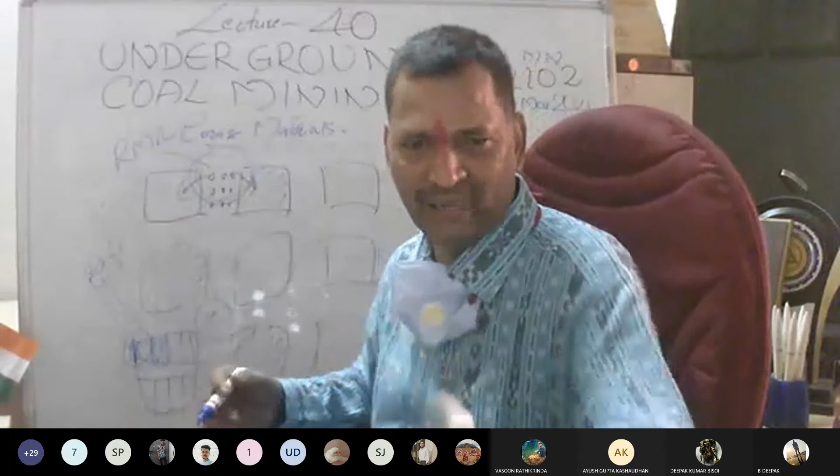Now coming to long wall, compared to this, in long wall what is happening? In long wall, the situation is not like a pillar - this is a long wall where everything is a goaf edge. Now you are able to see this - this is your long wall panel. Suppose you are moving like this with whatever barrier in this way, and this is your long wall face moving like this. This is a long wall retreating face.

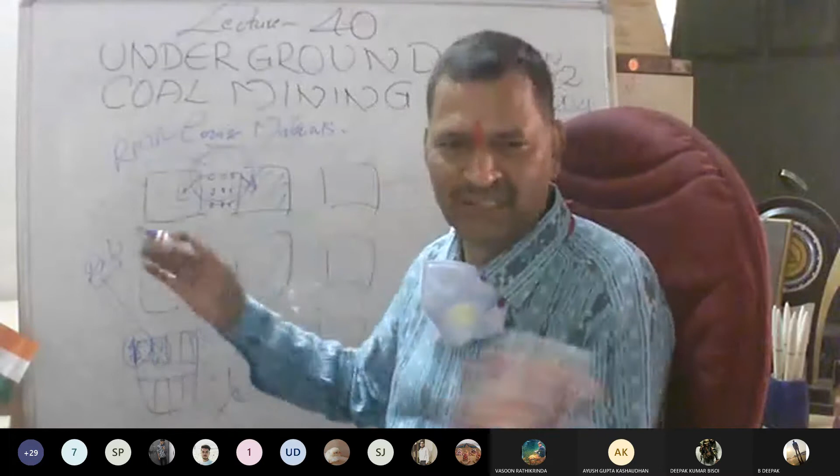Now you are having these supports here - these are your shield supports, and of course these are your barrier pillars. It appears like this, and here you are having in advance some support system in the gate roads. So you are supposed to design what type of support is required in the gate road as well as your chock shield supports. As far as this is concerned, there are so many approaches, and all this is a goaf.

That is the difference - this is all goaf compared to board and pillar workings. In board and pillar, when it's development, you have pillars on both sides in the development gallery where rock mass rating is used, and in depillaring we use rock mass quality where stress reduction factor SRF is also included. That is the reason why we use that rock mass quality for designing support in the slices, junctions, and other places - the goaf edges.

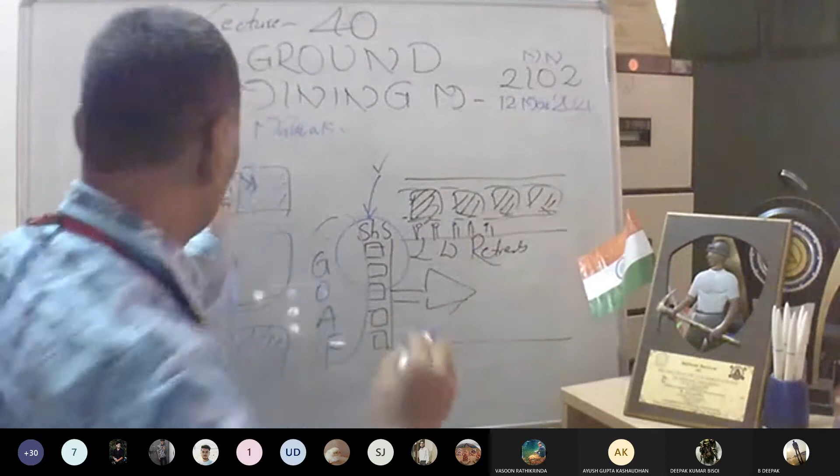In this case, now both will not work. What we are doing is trying to estimate how much load is coming from the roof and how much each chock shield is supposed to carry. So those approaches I have given you in this material, my beloved students, and within a few minutes I will show what material I have provided. If any doubts, definitely we will discuss more in additional classes.

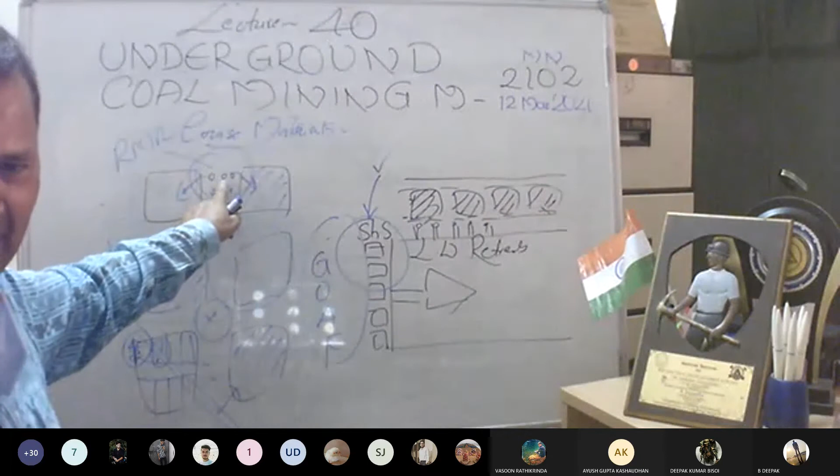This is the design of support for long wall workings. There is a Barry's approach - now just see, it is very simple to understand. When this is a long wall panel, this is the surface. Now any chock shield working here in these panels, you are supposed to provide capacity because the person is here working, and from the surface load is coming on this.

So for my chock shield, I should design what the capacity should be. For that, total load is acting on this, because when you consider this all goaf, total load is acting on this, and there comes the role of your overhang - whatever is the overhang length. That's why starting from the Barry's approach, support spacing, then overhang length - how much, if there is more overhang, then more load will come.

Suppose this is your chock shield, whatever chock shield - when there is more overhang, more load will be acting on the chock shields. That's why this parameter was taken. Then on the chock shield, how much load from the roof is acting is taken from the caving height - that is an important issue.

When you understand that much, that is sufficient, my beloved students. Then later you can read all these things, and definitely if any doubt we will discuss. That means ultimately when load is coming from the roof, this is your chock of 4.5 meter length, 1.5 meter - how much load is coming on this depends on the overhang length, and then caving height, that much load it should take, because the other side is a goaf.